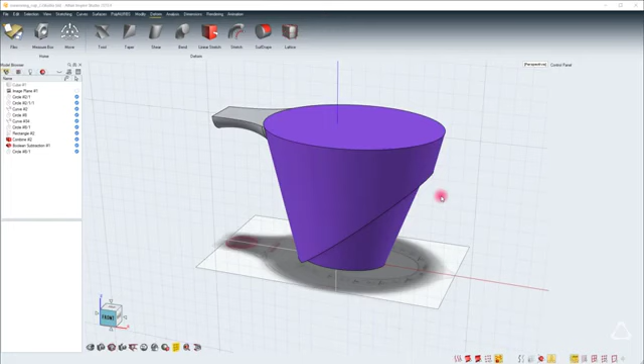Okay, let's start by shelling this main surface of the cup. We'll use regular shelling with a thickness of about 0.05 to start with, and one of the features in Studio is that you can apply custom shelling to some faces. So if you turn on custom mode, you should be able to select a face.

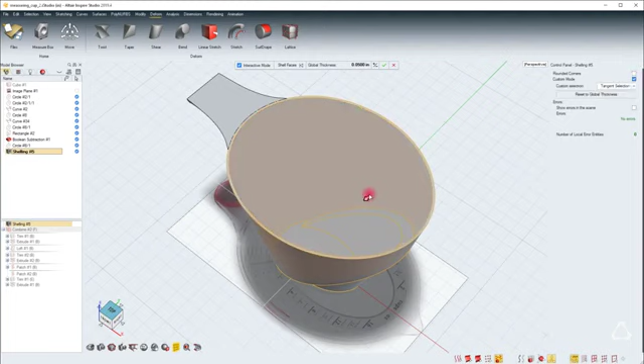So I want to make the bottom face thicker, so I just select it and then I give a value of 0.1. This will give me custom values for the bottom face. With this out of the way, let's move on to the handle.

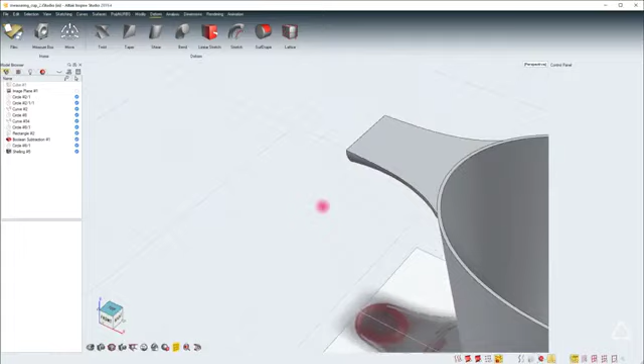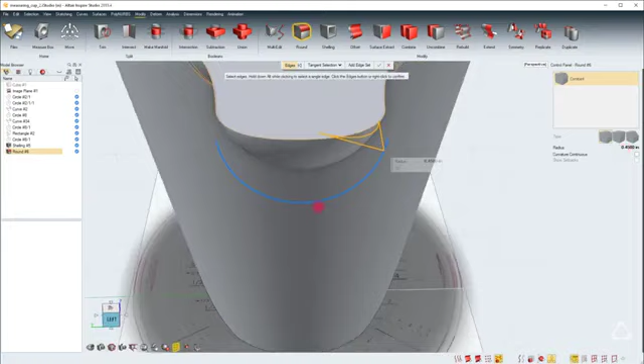Here, in order to get a rounded shape towards the back, we can easily achieve that by adding a round to this edge and maybe give a radius of about 0.4 or 0.45 inches. You can do one of those until you get a nice clean shape. Hit the green check mark to finish.

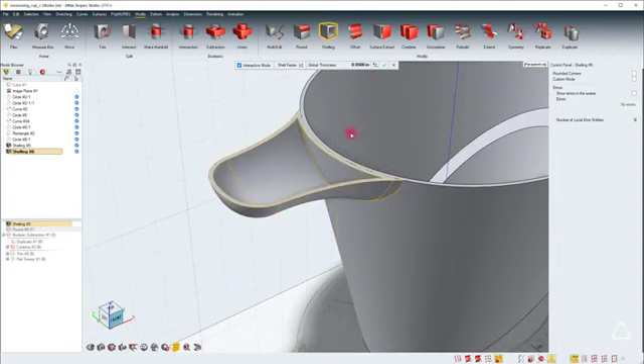And now we can add shelling to this portion too. So hit the shelling tool and select the top face, and of course it will turn red if the thickness value is too high. You want to lower it down maybe to 0.05. In order to remove this inner face, you can add that to one of the inputs.

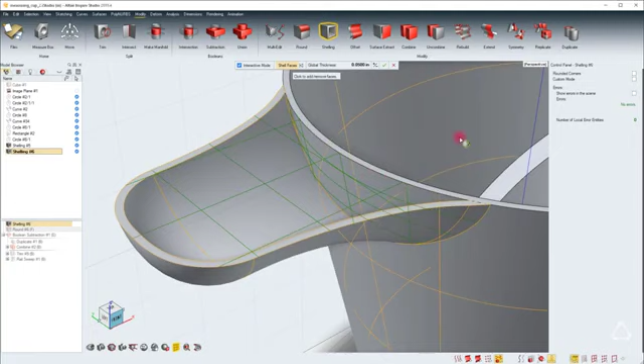So for the shell faces, you select the shell faces in the guide bar. If you move your mouse over the edge, you will notice there are several options. So you want to select this face round because it's highlighting the inner face. So when I select that, that face will be added to the input and it will be removed.

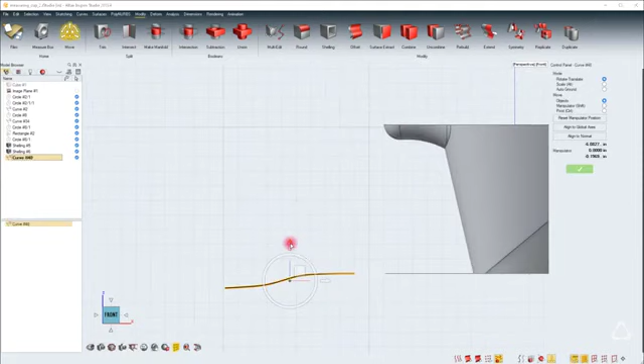Next part is to trim the back portion of the handle off. The way we can do this is by creating a simple NURBS curve. And now I'll move this curve up by 4 and then I will place it so that I can trim this rear portion of the handle.

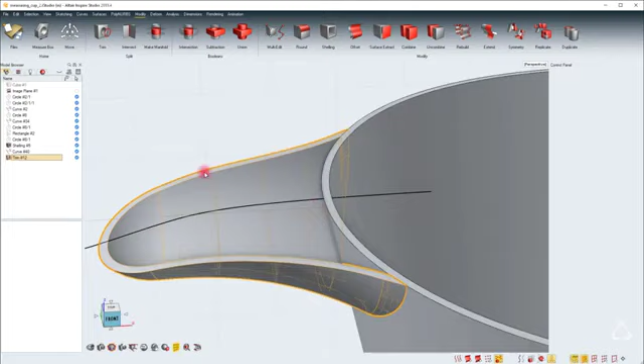Let's invoke the trim, select this rear portion, the curve, right click and then remove this top part. It looks nice and clean now, so we can move on to the next part, which will be to create this front lip using the lattice tool.

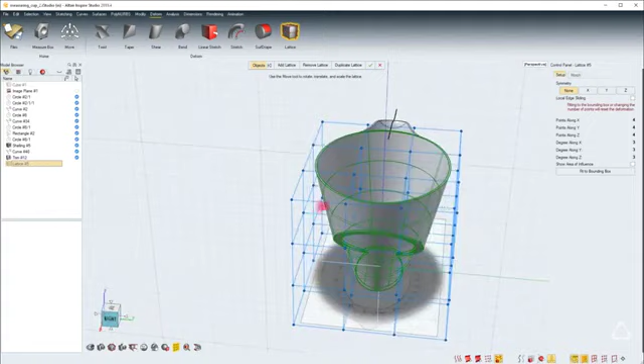So lattice is a new tool in Studio. You can find it under the deform tab. So lattice lets you edit the shape of any object. You can select the tool, then pick the object, and a lattice will be drawn in the view. So this is a default lattice 4x4x4.

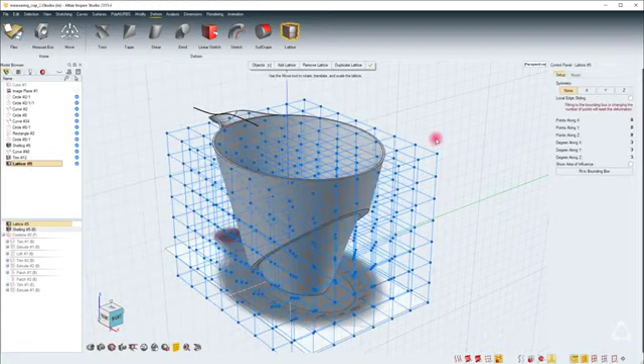We want to increase the number of points so that we can edit only the top portion of the cup. So I'll just change this to 8x8x8. If you close, it's okay. You can double click on the lattice in the model browser to bring it up, and now you can actually select the points that you want to move, how it affects the underlying surface.

For this point, I actually want to increase the points along Y to an odd number because I want one point at the symmetry axis. So here, once we're done with the setup, we can select the morph tab.

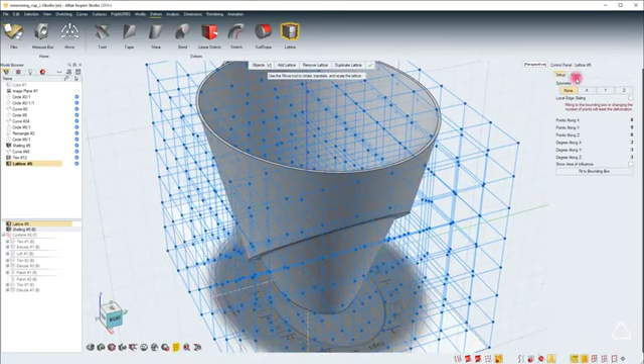In the morph tab, you're going to move the points, and in order to see what influence they have on the underlying surface, you can turn on show area of influence, and if you select a point, it will show you what it will do to the underlying surface.

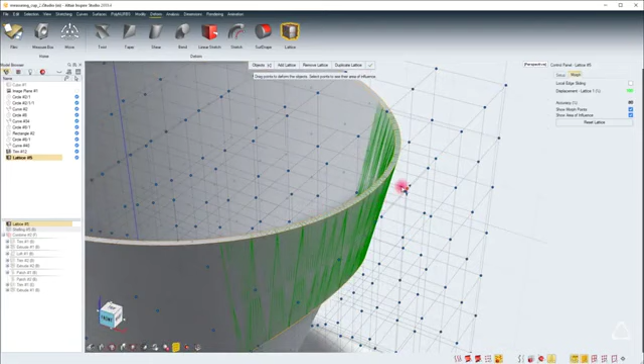So let's just start by selecting the midpoint here and use one of these arrows to just pull it out. So all I have to do is get this shape, and I can go to the top view and then look at the image plane to make sure that I'm doing what I want to do.

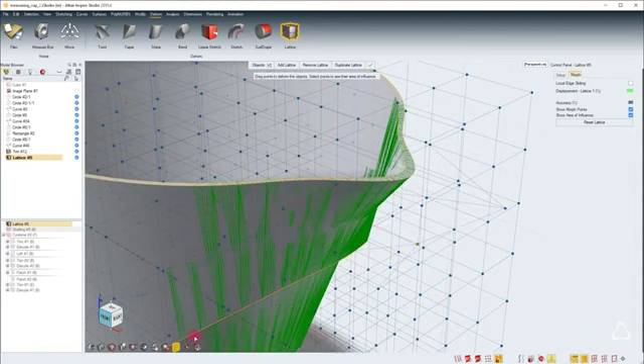I will also add some transpose to this particular point so that it's nice and even. So I'll probably go to the front view and make sure that the falloff is neat. So here we are with the shape easily achieved using the lattice tool.

The next part will be to create the handle of this cup. So if I open the image, we can just quickly run through the process. We're going to create a circle and then we'll extrude this circle. And in Studio we can add some more sections, so we'll add some sections wherever we need to edit the shapes in order to get something like this. So of course the shape on these two sides is also not planar, so we'll edit that shape too.

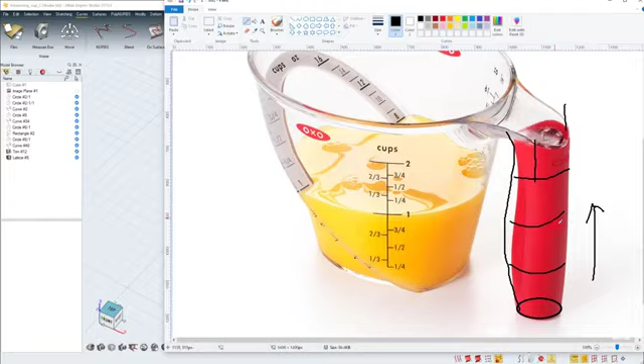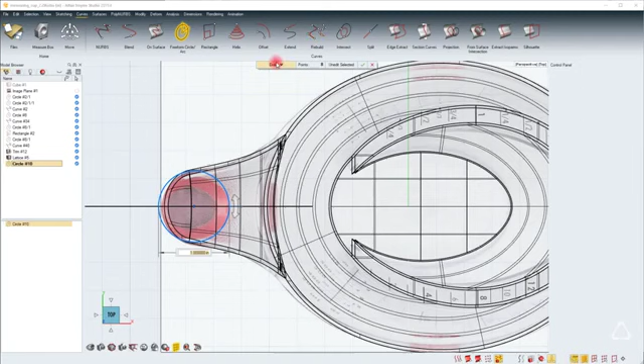Let's go to the top view and create the freeform circle. Hit 1 on the keyboard, and you can temporarily disable the snaps by using Alt. So I'm hitting Alt and then just creating the circle. So let's create a circle of about 1 and change the value to NURBS degree 3 and select this back face and hide it. So I'll use this in points mode to just sculpt.

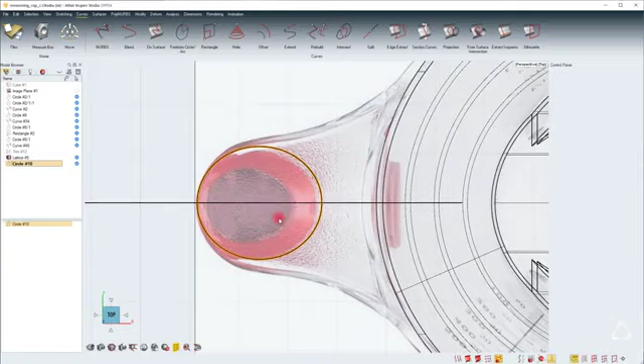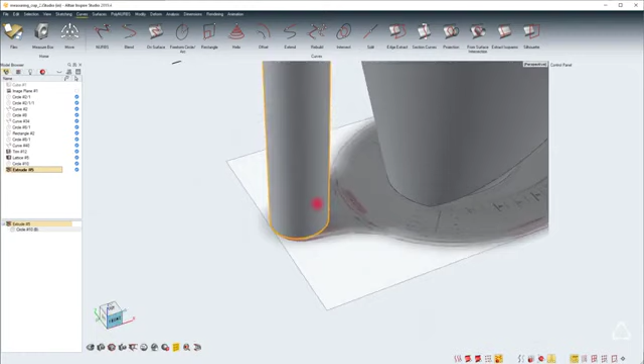So with this done, I'm going to start extruding it. If we bring back the trim, go to extrude, select the circle, we'll just extrude it past the trim for the time being. So one thing you want to make sure is that it actually intersects here. So that means either moving the circle itself or just the points on the circle. We can do this by going to a different view. Hit 1, select the circle, edit it, just take these 2 points and move them. You can hold Alt so that it doesn't snap anywhere.

We can double click the extrude. You can enable caps. For extrusion surface, from exact you can change it to degree 3. So the points value is the total number of sections that are available. Right now it's set to 3. Let's move it to about 5 because we need at least 3 intermediate sections.

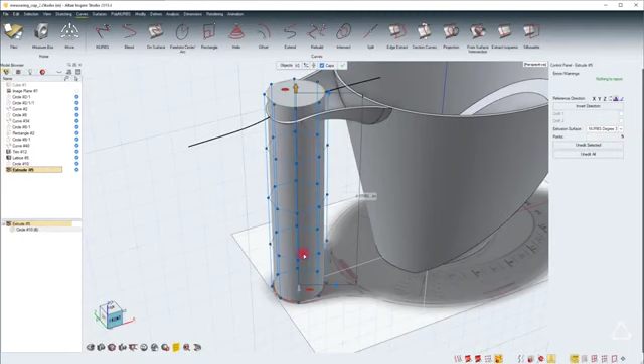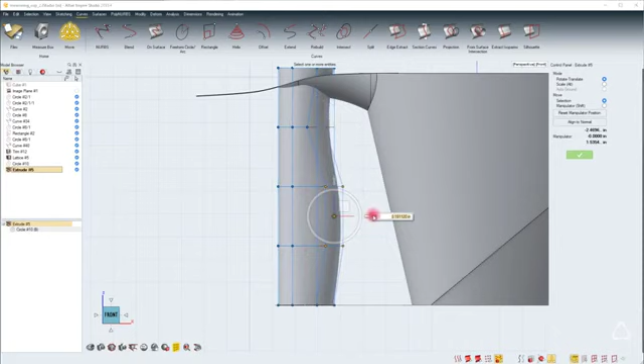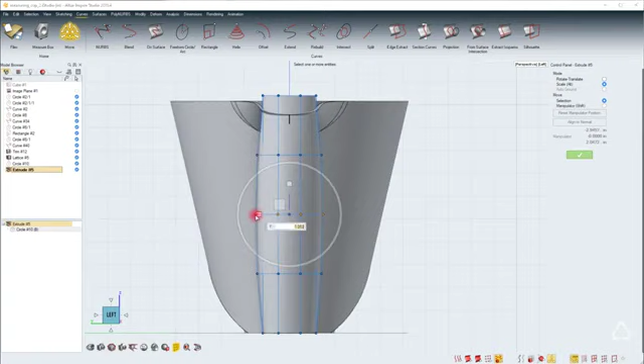So let's go to the front view. I'm just going to grab these 2 points here, bring the move tool. I'm going to disable snaps for the time being and then just push this back a little bit. I'm going to select these 4 and pull it out. Select these 3, hold Control and then select these 3. Hit the Alt key so that we can scale it. So with this done, I think the handle looks pretty neat.

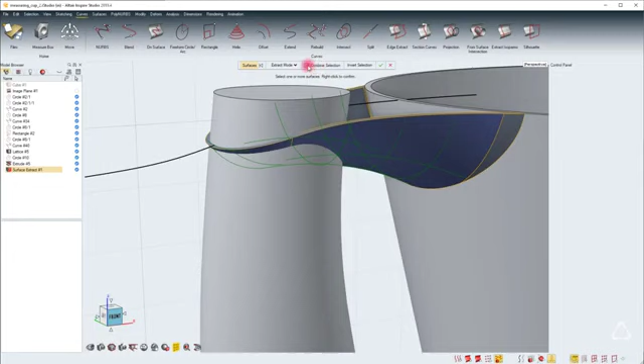The only thing left is to cut it along the shape of this underside, for which you can use surface extract. So select the surface extract and we will select this surface and this one to extract it. You want to make sure that you combine the selection and change the extract mode to duplicate. So what this does is it removes the association with the part, so you can easily use that for other operations. So now right click, swipe and do an intersect.

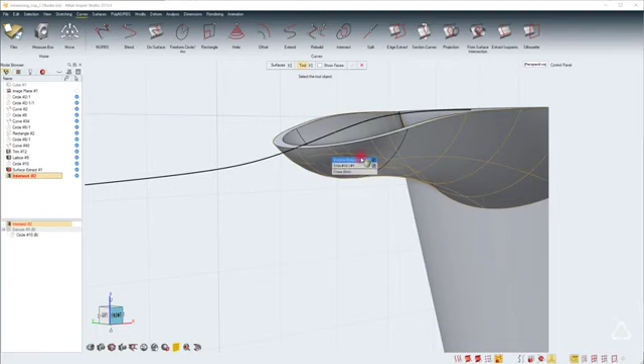For surfaces I'm going to use this. For the tool I'll just click here to bring up this pop-up menu and select surface extract, say keep back or keep front. We have finished most of the modeling for this product. The only thing left is to add some rounds on the inside of the cup and also on these parts, and then in the last part we'll quickly look at how to create a render of this product.